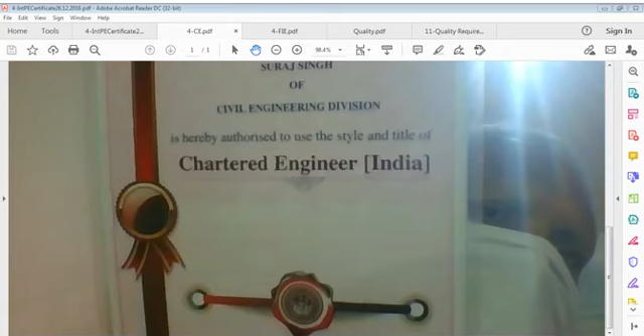And why do we have certificates? That's another question. Certificates like you're watching here, Chartered Engineer India, as well as corporate membership, fellow. Why do we have this? We have these certificates to tell the whole world. Actually, by these certificates, people know - gazette declared by these certificates. Why do I say gazette? Because these are formal certificates issued in every country for people of that country, and those people should know that this person is of this qualification or professional status. That's only indicatively I'm saying, because these certificates declare that you can utilize this person for your work. This is up to that person then, what that person takes interest - either one is hired, or one serves in capacity as employee, both ways. Well, I'm not going to do much on that. I'm just closing this because talking of this, otherwise with certificate I close this for some reason.

And now coming back to the topic, and that is quality. I have added in this quality issue also SHE - SHE stands for safety, health and environment. Quality is one part of life. Simultaneously, safety, health, environment being three other parts of life, which are one in three.

If there is safety, that is a must. There must be safety, otherwise you can't stay. If you are not safe, very easy - means there is no need for any explanation on this. One should be safe all the time. That is basic requirement - safe from every adverse impact. Safety should be there, whether you sleep or you work or you walk or do whatever activity you perform - any action you can perform only if you are safe.

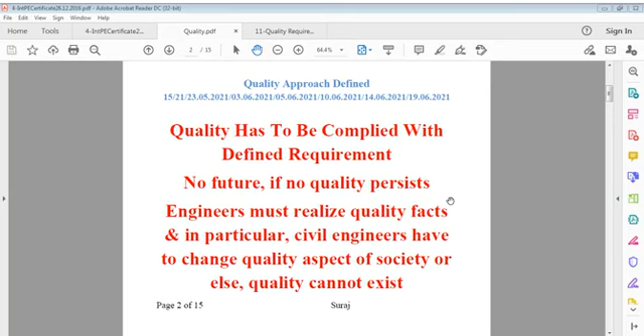So what I say, quality, safety, health, environment and all this, then you can say quality has to be complied with defined requirements. No future if no quality. Similarly, I can say no future if no quality persists. Engineers must realize quality facts, and in particular, civil engineers have to change the quality aspect of society, or else quality cannot exist.

So what I say, design of structures and others must be decisive, safe and qualitative, and reliable for execution. So they should be decisive. Decisive means what? You have to make decisions considering all aspects of safety and material quality, work quality and all. That's the point here.

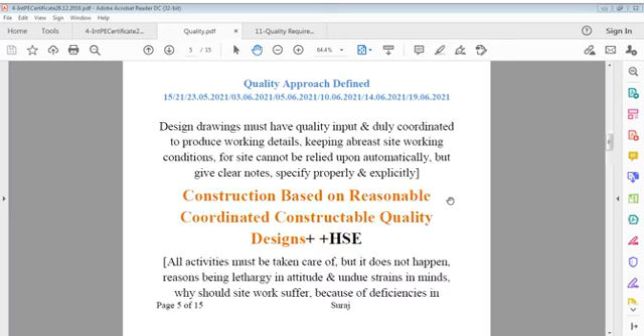So you can say construction based on reasonable, coordinated, constructible quality. That was done before also. Quality in designs plus HSE must be taken into consideration while designing. It's a must. What health level this project gives to society, what safety levels does it provide, and in what way environment can be improved by use of such materials or systems or technology. That all must come into picture, or else we only beat about the bush and nothing else.

We'll take care of HSE later on also. Now, as we discussed before, long back, last time, about quality checks. We refer to many items of buildings, of structures. Those items can't be ignored. This is a small list only, this is a long list actually. And we talk of checklists and ITPs. ITPs means inspection and test plans, and checklists to check whatever is required.

Whole structures, all structures, architectural items or finishing items, all items must be quality based. Even if you buy a small item, it should be quality based. It's not a question of what item it is, whatever item, because you are not getting it free of cost. You have to pay, and if your pay is not quality earning, certainly you won't mind about that. Oh, I made this money just for chance, so no problem, I can accept everything. If that thought comes to you or comes to one, we can never achieve quality. We can never achieve it.

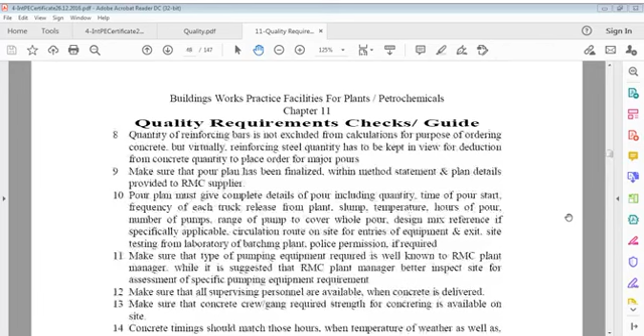When I say many activities are there, I explained to you about suspended slab last time, how slabs are important. There was RCC, DC generator, alternators, all these, suspended slab. It was a checklist for suspended slab concrete pour, and I said this is ultimate.

This is ultimate for accommodation, ultimate for living under. Columns were not ultimate, foundations were not ultimate, but slabs are ultimate, because slabs, once ready, allow you to use it under or use it over, both ways. You can use these slabs by staying below them. You may say slab is my head, or you can say roof is on my head, because roof slab is also a slab.

Suspended slab I call it, that's the term of suspension, means these are hung on some supports. These are hung on columns or walls, wherever. These are hung.

Suspended slabs, or slabs you can call, people call them lintel also, some people. I don't mind what they call it, but they should understand that they walk on that, they sleep below that, what sort of strength it should have, what sort of value should be given in its construction. That is a very important point.

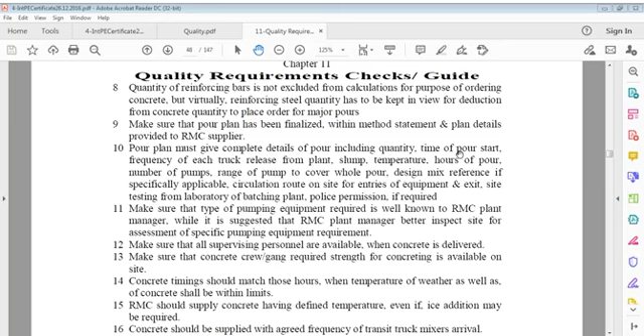This was only reason I tried to reflect these points. For example, in this I say quantity of reinforcement bars and quality of reinforcement bars are very important.

Then you can say pour plan. How do you want to pour it so that it should be a professional pour? We can call it professional pour, professional work of preparation, professional form work, professional steel fabrication, and electrical professional items, first fix, second fix. Likewise, we can say all these are accommodated in slabs, and slabs are the roof you have.

I go to there is another one, and that is checklist for massive blocks, foundations for equipment, foundations for machines, which are also part of life. Though it's not direct to you, these support you. You get electricity, you get some machine parts, you get some machines, you get some equipment. These are directly or indirectly connected to foundations.

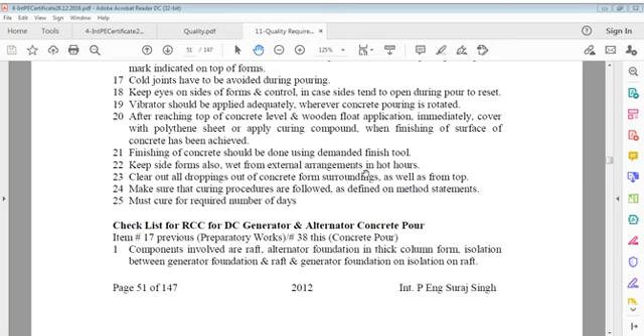And this part we should take very seriously. If we don't take it seriously, we do not understand anything. How this works, how it doesn't work, that's the only point here.

We have discussed many concrete pours, like how to prepare a surface or form a surface to start with, which we call formation. Formation of whatever work we do. Whatever work we do, that work shall have a foundation, and that foundation starts at some formation.

Formation means in what form you want to fill in that pit, in what form, a kind of format. So formation. And that formation is really the base of work. It's kind of foundation of a foundation, you can say. Right? Foundation of a foundation is called formation. If we do not know formation, we can't do foundation.

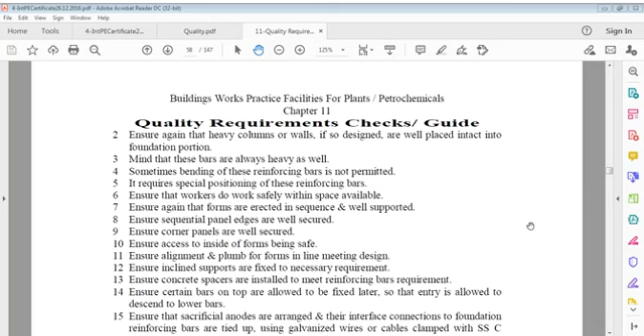I was talking about some items of heavy concrete. Now let's take a heavy compressor foundation concrete pour. Maybe I don't remember if I talked to you about this before, but it doesn't matter if I explain it again. What's wrong with that? After all, practice makes you stronger. So let us briefly talk on this.

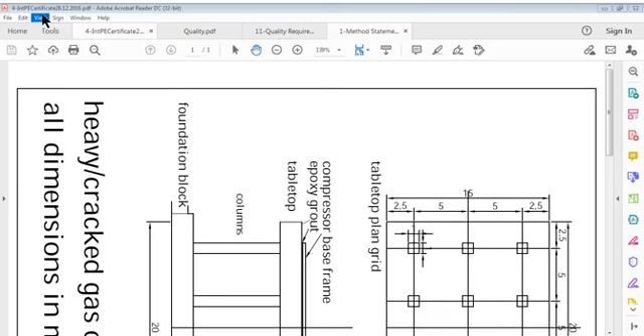I'm talking of compressor foundation concrete pour, and I'm sure I must have a diagram there which you have seen. Let me go and sort the diagram out from my records for your knowledge. Let's watch that. It is the compressor foundation. Yes, it is here. Now you can see the sketch here. It will now be clear to you, I think. Yes, it's clear to you.

Now you can see this is a plan here of the tabletop, and this is the compressor area. This is a plan, and these are various grids of this tabletop, and this is your section of the compressor base foundation. This section is a different one. It's like a structure, you can see this line here. This is the ground line, and this is the foundation, a big one. It's not an ordinary foundation, it's very much complicated, a massive block.

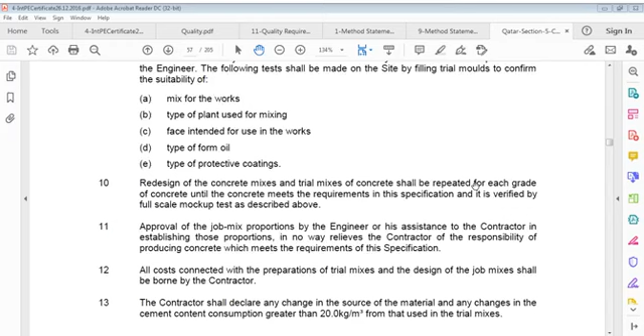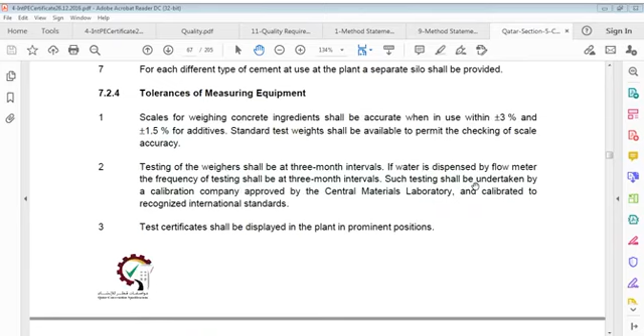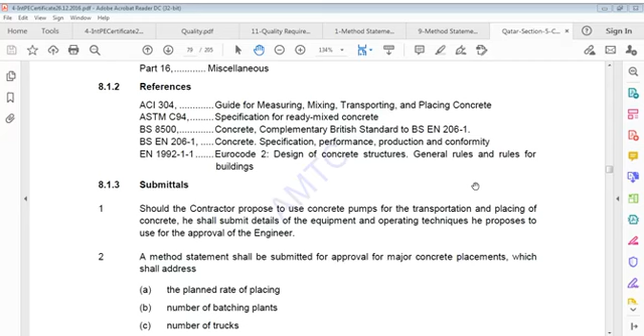Well, it's a long specification. In fact, I'm trying to find a temperature zone. There's a lot of specification in this. I'm not trying to find that.

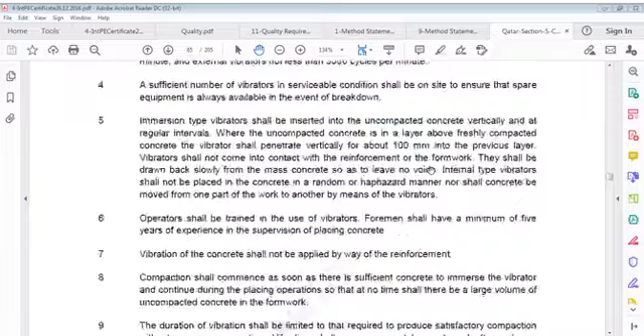All right, we'll talk about this. It's important also, let's say. This is placing concrete, a very important item. I will explain to you how to place it.

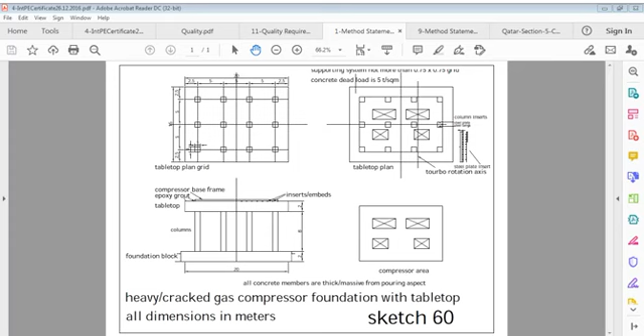Before this, let's see what the specification statement says. Contractor shall obtain approval of engineer to his proposed arrangements before beginning concreting. This is very common. Placing and compacting of concrete shall be carried out under, let us say, section 175. Do it. Contractor shall obtain approval of engineer to his proposed arrangements. Then all placing and compacting of concrete shall be carried out under direct supervision of a competent member of the contractor's staff with a minimum of 5 years of experience in concreting works.

5 years minimum - it can be 10, 15, doesn't matter. This means an experienced person is required, that's the demand of the specification, and the work must be done in a manner to produce watertight concrete of maximum density and strength. It's a very important point - watertight concrete of maximum density and strength.

For night concreting operations, contractor shall arrange adequate suitable lighting for illumination purposes. Contractor shall provide safe, secure access for all personnel. Safe, secure access for all personnel - that is very much expected, safe and secure access for all personnel during concreting operations.

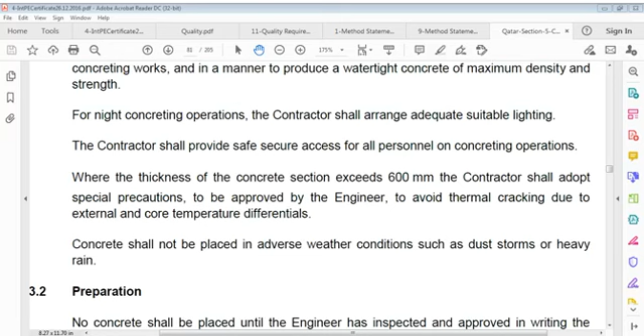Concrete shall not be placed in adverse weather conditions such as dust storms or heavy rain. Now, what is preparation? No concrete shall be placed until the engineer has inspected and approved in writing the surfaces upon which concrete is to be placed, formwork and reinforcing steel. Contractor shall give engineer at least 24 hours notice to enable this inspection.

That's all under different conditions. 24 hours notice is required. If concrete is not placed within 24 hours of approval being given, approval shall be obtained again before concreting. This means the previous approval automatically stands withdrawn.

An inspection shall be made immediately prior to concreting to check cleanliness of forms. This means a supplementary inspection - one inspection is for approval, then just before concrete, another inspection. This is procedure, only for procedure. All the time, engineers are there on site.

Wood forms, unless lined, shall be oiled. Wood forms means plywood - if it's lined, okay. If it's not lined, it shall be oiled or wetted with water in advance of placing concrete so that joints shall tighten and prevent seepage of cement grout from the mix.

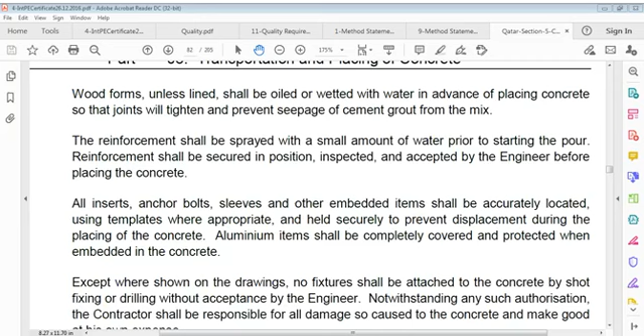Reinforcement shall be sprayed with a small amount of water prior to starting the pour. Reinforcement shall be secured in position, inspected and accepted by the engineer before placing concrete. All inserts, anchor bolts, sleeves and other embedded items shall be accurately located using templates where appropriate, and held securely to prevent displacement during placing of concrete. Aluminum items shall be completely covered and protected when embedded in concrete.

Except where shown on drawings, no fixtures shall be attached to concrete by shot firing, or shot fixing as it's also called, or by drilling, without acceptance by the engineer. No fixture shall be allowed. Notwithstanding any such authorization, the contractor shall be responsible for all damage so caused to concrete and shall make good at his own expense.

Water shall be removed from excavations before concrete is deposited. Any flow of water shall be diverted through proper side drains and removed without washing over freshly deposited concrete. All dewatering works shall be continued as long as required; dewatering activity must go on even during concrete placement, until the concrete hardens.

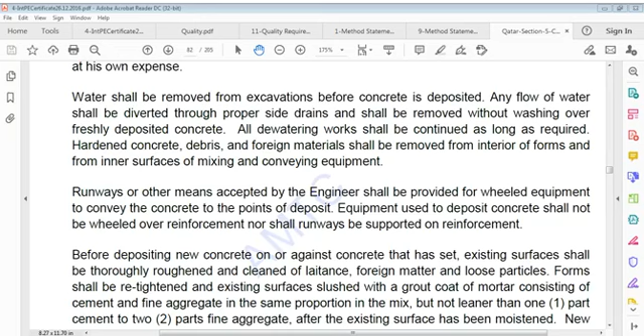Debris and foreign materials shall be removed from the interior of forms and from the inner surfaces of mixing and conveying equipment. Runways or other means accepted by the engineer shall be provided for wheeled equipment to convey concrete to points of deposit. Equipment used to deposit concrete shall not be wheeled over reinforcement, nor shall runways be supported on reinforcement.

Before depositing new concrete against concrete that has already set, existing surfaces shall be thoroughly roughened and cleaned of laitance, foreign matter and loose particles. Forms shall be retightened, and existing surfaces slushed with a grout coat of mortar consisting of cement and fine aggregate in the same proportion as the mix, but not leaner than 1 part cement to 2 parts fine aggregate. After the existing surface has been moistened, new concrete shall be placed before the grout has attained its initial set.

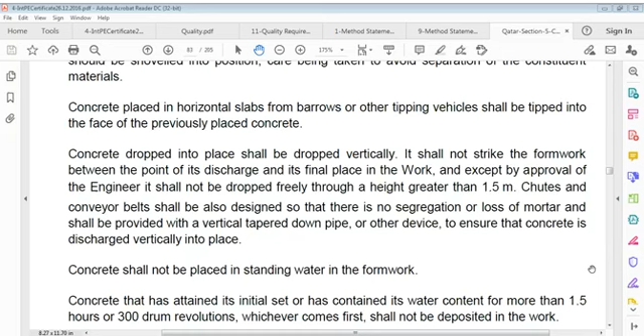Concrete shall not be placed in standing water in formwork. Concrete that has attained its initial set, or has contained its water content for more than 1.5 hours...

...or 300 drum revolutions, whichever comes first, shall not be deposited in the work. Important point: concrete that has attained its initial set or has contained its water content for more than 1.5 hours or 300 drum revolutions, whichever comes first, shall not be deposited in the work.

Cold weather concreting shall be in accordance with EN 1992-1-1, CIRIA Report 67, and ACI 306.

Hot weather concreting shall be in accordance with Part 15 of this section. Special care shall be taken to protect new concrete from the harmful effect of drying winds, and during wet weather, concrete shall be adequately protected as soon as it is in position.

No concreting shall be carried out during periods of continuous heavy rain unless it is completely covered during mixing, transporting, and placing. No concreting shall be carried out during dust storms.

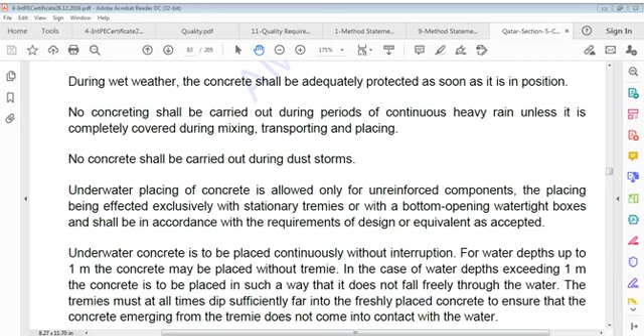Underwater placing of concrete is allowed only for unreinforced components, placing being effected exclusively with stationary tremies or with bottom-opening watertight boxes, and shall be in accordance with the requirements of design or equivalent as accepted.

Underwater concrete is to be placed continuously without interruption.

For water depths up to 1 meter, concrete may be placed without tremie.

In case of water depths exceeding 1 meter, concrete is to be placed in such a way that it does not fall freely through water.

Tremies must at all times dip sufficiently far into freshly placed concrete to ensure that concrete emerging from the tremie does not come into contact with water.

All work connected with placing of concrete under water shall be designed, directed, and inspected with due regard to local circumstances and purposes.

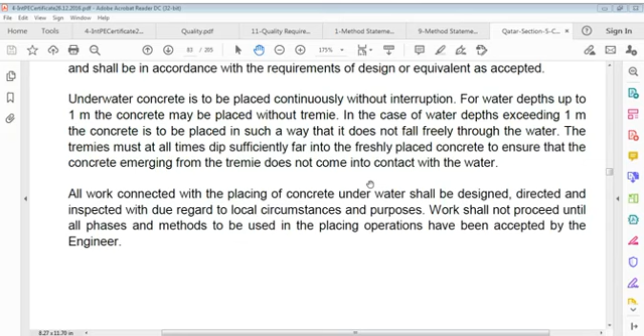Work shall not proceed unless all phases and methods to be used in placing operations have been accepted by the engineer. Transportation and placing of concrete continues.

Stops in concrete at the end of a period of work shall be made only at construction joint locations shown on drawings and/or positions accepted.

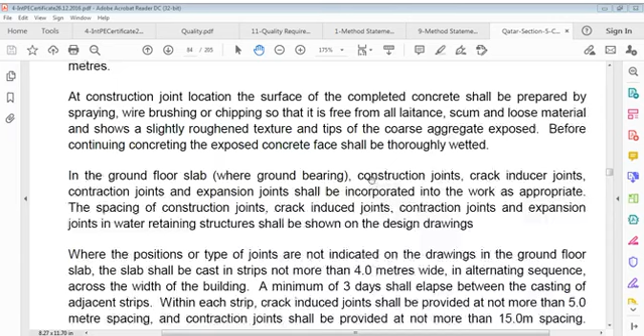In ground floor slabs, where ground bearing, construction joints, crack inducer joints, contraction joints, and expansion joints shall be incorporated as appropriate.

Construction joints, crack inducer joints, contraction joints, and expansion joints shall be incorporated into the work as appropriate.

Spacing of construction joints, crack inducer joints, contraction joints, and expansion joints in water retaining structures shall be shown on the design drawing.

Where positions or types of joints are not indicated on drawings, the ground floor slab shall be cast in strips not more than 4 meters wide, in alternating sequence across the width of the building.

To reemphasize: where the position or types of joints are not indicated in drawings, the ground floor slab shall be cast in strips not more than 4 meters wide in alternating sequence across the width of the building.

A minimum of 3 days shall elapse between casting of adjacent strips.

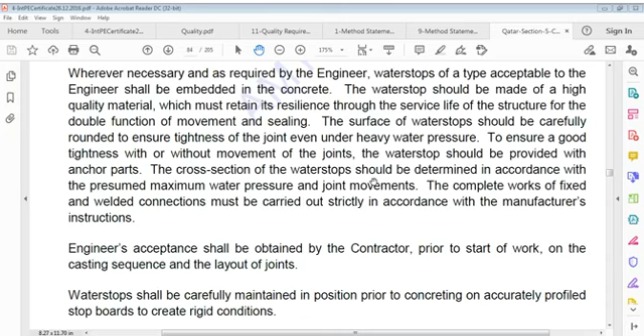Complete works of fixed and welded connections must be carried out strictly in accordance with the manufacturer's instructions. The engineer's acceptance shall be obtained by the contractor prior to starting work on the casting sequence and layout of joints. Water stops shall be carefully maintained in position prior to concreting, on accurately profiled stop boards, to create rigid conditions. The type of water bar used shall suit the joint and purpose according to the water bar manufacturer's recommendations.

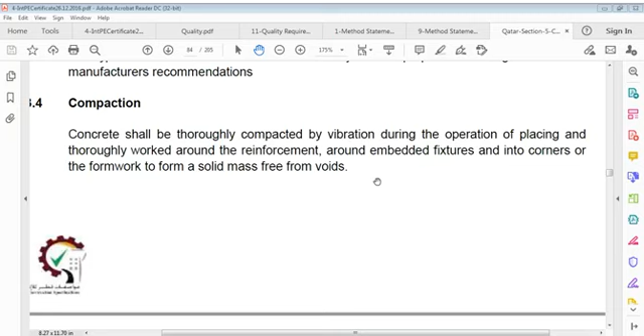Compaction: concrete shall be thoroughly compacted by vibration during placing, and thoroughly worked around reinforcement, around embedded fixtures, and into corners of formwork to form a solid mass free from voids.

When vibrators are used to compact concrete, vibration shall be applied continuously during placing of each batch of concrete until expulsion of air has practically ceased, and in a manner that does not promote segregation of the constituents of concrete. Immersion type vibrators shall be capable of producing not less than 10,000 cycles per minute, and external vibrators not less than 3,000 cycles per minute.

A sufficient number of vibrators in serviceable condition shall be on site to ensure spare equipment is always available in the event of a breakdown.

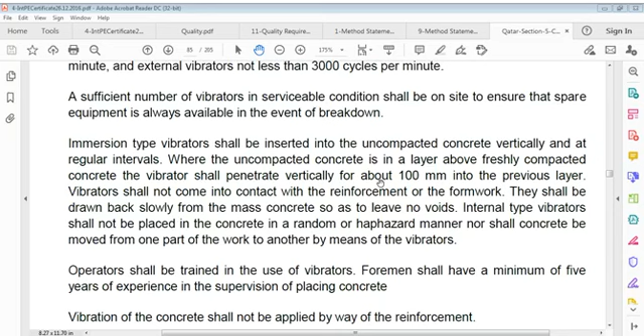Immersion type vibrators shall be inserted into uncompacted concrete vertically and at regular intervals. Where uncompacted concrete is in a layer above freshly compacted concrete, vibrators shall penetrate vertically for about 100 mm into the previous layer. Vibrators shall not come into contact with reinforcement or formwork, and shall be drawn back slowly from the mass concrete so as to leave no voids.

Internal type vibrators shall not be placed in concrete in a random or haphazard manner, nor shall concrete be moved from one part of the work to another by means of a vibrator. Operators shall be trained in the use of vibrators. Foremen shall have a minimum of 5 years of experience in supervision of placing concrete. Vibration of concrete shall not be applied by way of reinforcement.

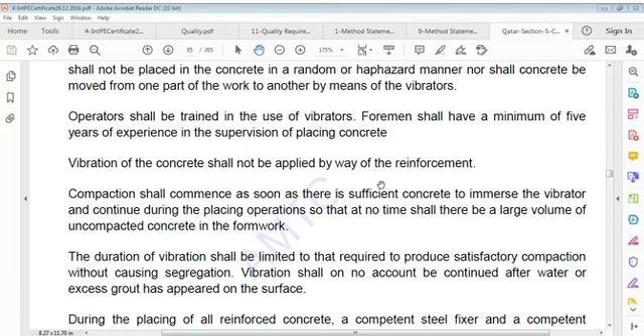Compaction shall commence as soon as there is sufficient concrete to immerse the vibrator and continue during placing operations, so that at no time shall there be a large volume of uncompacted concrete in the formwork. Duration of vibration shall be limited to that required to produce satisfactory compaction without causing segregation. Vibration shall on no account be continued after water or excess grout has appeared on the surface.

During placing of reinforced concrete, a competent steel fixer and a competent carpenter shall be in attendance on each concreting gang. They shall ensure reinforcement, embedded fittings, and forms are kept in position as work proceeds.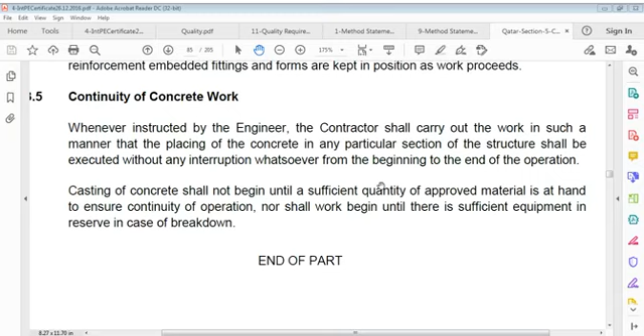Continuity of concrete work: whenever instructed by the engineer, the contractor shall carry out work in such a manner that placing of concrete in any particular section of structure shall be executed without interruption from beginning to end of the operation. Casting of concrete shall not begin until a sufficient quantity of approved material is at hand to ensure continuity of operation, nor shall work begin until there is sufficient equipment in reserve in case of breakdown.

This was some general methods given for this purpose, and we are not going to talk about formwork in this case. Quality assurance is there, but it is at the batching plant. Now, what about forms and materials of form?

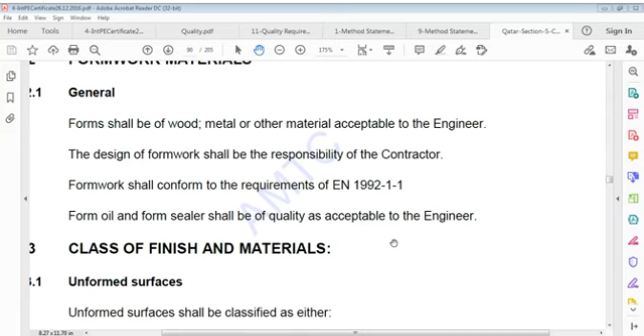Say, wood material or other materials acceptable - that's a very important point. Or you can say class of finishes. There are some classes of finishes. Timber trowel finish, the U4 class, is an unformed surface - there is no form on that. Unformed is indicated by U. So U4 is timber trowel finish, U3 is steel trowel finish, U2 is brush finish, and U1 is other finish designated by the engineer. Here we are saying timber trowel finish is U4, steel trowel finish is U3, brush finish is U2, and U1 is other finish.

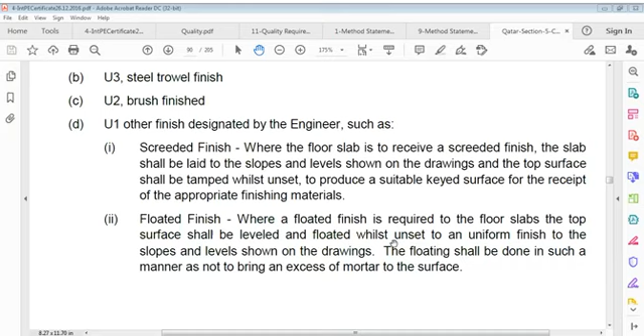Screed finish: where the floor slab is to receive a screeded finish, the slab shall be laid to slopes and levels shown on drawings, and the top surface shall be tamped while unset to produce a suitable keyed surface for receipt of appropriate finishing materials. Floated finish: where a floated finish is required on the floor slab top surface, it shall be leveled and floated while unset to a uniform finish to the slopes and levels shown on the drawing. Floating shall be done in such a manner as not to bring an excess of mortar to the surface.

Dust-proof finish: where concrete surfaces are required to provide a dust-proof finish, these shall be treated with 2 coats of accepted material. Each coat shall be applied with a soft brush on a clean and dry surface in accordance with manufacturer's printed instructions.

Non-slip finish: concrete surfaces described in drawings as having a non-slip finish shall be treated with carborundum dust evenly sprinkled on whilst concrete is still grey, at a rate of 1.5 kg per meter square, and lightly troweled in before final finishing. Alternatively, carborundum dust may be incorporated into the finish by means of a mechanical power float.

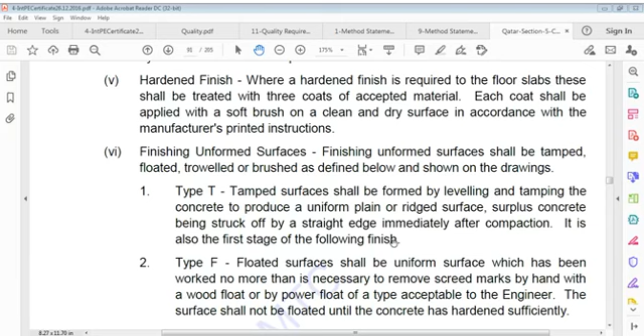Hardened finish: where a hardened finish is required to floor slab, these shall be treated with 3 coats of accepted material. Each coat shall be applied with a soft brush on a clean and dry surface in accordance with manufacturer's printed instructions.

Finishing unformed surfaces: finishing unformed surfaces shall be tamped, floated, troweled, or brushed as defined below. Type T tamped surface shall be formed by leveling and tamping concrete to produce a uniform plain or ridged surface, with surplus concrete being struck off by a straight edge immediately after compaction. It's also the first stage of following finish.

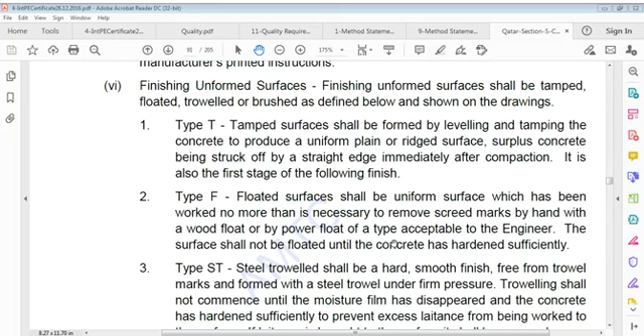Type F floated surface shall be a uniform surface which has been worked on no more than is necessary to remove screed marks, by hand with a wood float or by power float of a type acceptable to engineer. Surface shall not be floated until concrete has hardened sufficiently.

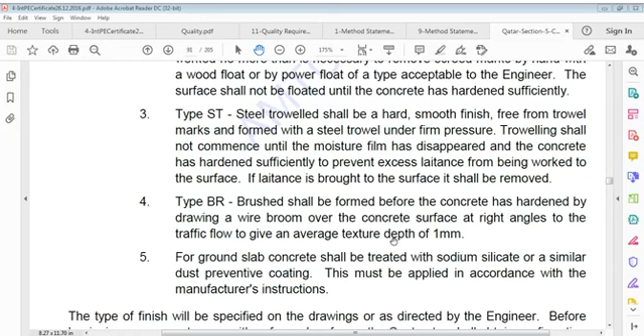ST steel troweled shall be a hard, smooth finish, free from trowel marks, and formed with a steel trowel under firm pressure. Troweling shall not commence until the moisture film has disappeared and concrete has hardened sufficiently to prevent excess laitance from being worked to the surface. If laitance is brought to the surface, it shall be removed.

Type BR brush shall be formed before concrete has hardened by drawing a wire broom over the concrete surface at right angles to traffic flow, to give an average texture depth of 1 mm.

For ground slab, concrete shall be treated with sodium silicate or a similar dust preventive coating. This must be applied in accordance with manufacturer's instructions.

This type of finish shall be specified in drawings or as directed by engineer before beginning any concrete pour with unformed surfaces. Contractor shall obtain confirmation of the type of finish required from engineer. Initial finishing of unformed surfaces shall commence immediately after placing and compaction have been effected. Suitable access boards or platforms shall be provided to allow access to all parts of unformed surfaces to be finished.

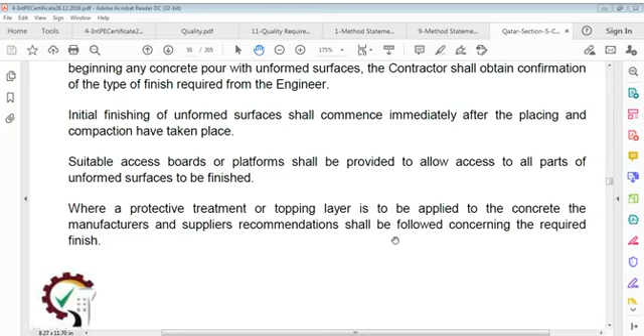Where a protective treatment or topping layer is to be applied to concrete, manufacturer and suppliers' recommendations shall be followed concerning required finish. Brush finish shall be obtained by carrying out a steel trowel finish and then using a suitable stiff nylon brush dragged lightly across the surface. Addition of a small quantity of water to the finishing trowel will be permitted to aid finishing.

Addition of a small quantity of water to the finishing trowel will be permitted to aid finishing.

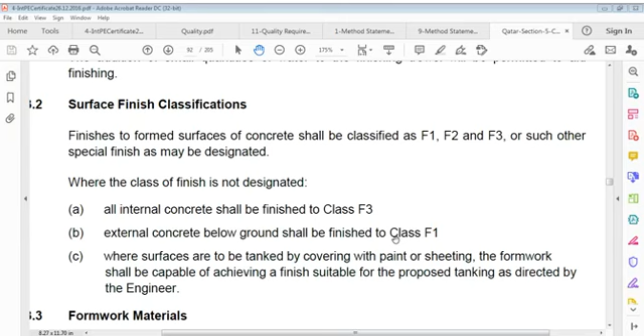Surface finish classifications: finishes to formed surfaces of concrete shall be classified as F1, F2, F3, or such other special finish as may be designated. Where class of finish is not designated, all internal concrete shall be finished to class F3. External concrete below ground shall be finished to class F1. Where surfaces are to be tanked by covering with paint or sheeting, formwork shall be capable of achieving a finish suitable for the proposed tanking as directed by engineer.

Formwork material: formwork for class F3 finish shall be lined with as large panels as possible of non-staining materials with a smooth, unblemished surface, such as sanded plywood or hard compressed fiber board, arranged in a uniform approved pattern and fixed to the formwork by oval nails. The same type of lining shall be used throughout any one structure. Unfaced wrought boarding or standard steel panels shall not be permitted.

Formwork for class F2 finish shall be faced with wrought tongued and grooved boards or plywood arranged in a uniform approved pattern, free from defects likely to detract from the appearance of the surface. Formwork for class F1 finish shall be constructed of timber or of whatever suitable materials which will prevent loss of grout when concrete is vibrated.

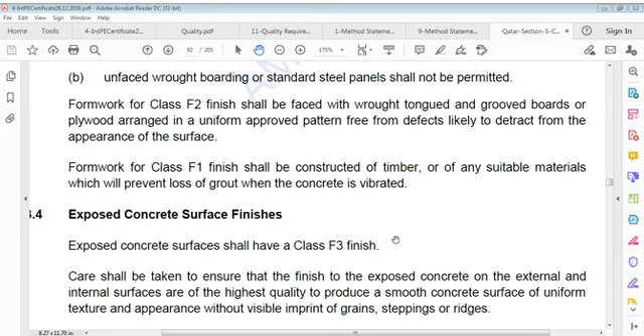Exposed concrete surface finishes: exposed concrete surfaces shall have a class F3 finish. Care shall be taken to ensure that the finish to exposed concrete on external and internal surfaces is of the highest quality, to produce a smooth concrete surface. This means exposed concrete surface shall have a class F3 finish.

Care shall be taken to ensure that finish to the exposed concrete on external surfaces are of highest quality, to produce a smooth concrete surface of uniform texture and appearance without visible imprint of grains, steppings or ridges. Resulting concrete shall be free from honeycombing, stains, fins, lipping, nail and screw marks, raised grain marks, or any other imperfections, and shall be of uniform surface, texture, and color.

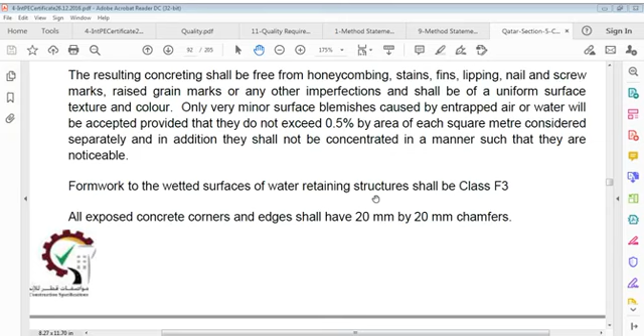Formwork to wetted surface of water retaining structures shall be class F3. All exposed concrete corners and edges shall have 20 mm by 20 mm chamfers. Grooves in exposed concrete shall be formed by attaching tapered planed timber battens accurately aligned to face of formwork.

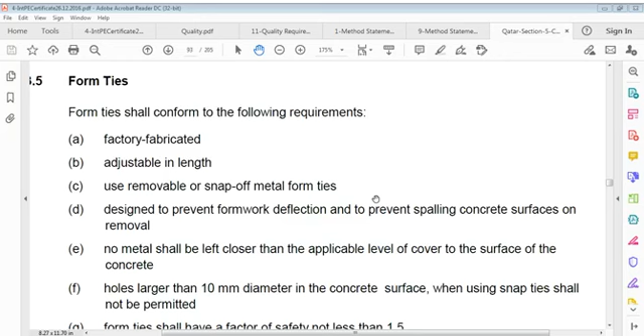Form ties shall conform to the following requirements: factory fabricated, adjustable in length, use removable or snap-off metal form ties designed to prevent formwork deflection and to prevent spalling concrete surfaces on removal. No metal shall be left closer than the applicable level of cover to the surface. Holes larger than 10 mm diameter in concrete surfaces when using snap ties shall not be permitted. Form ties shall have a factor of safety not less than 1.5.

I will talk later on all this.

Regarding coating and accessories: form coating shall be commercial formulation form coating compounds that shall not bond with, stain or adversely affect concrete surfaces requiring bond or adhesion, nor impede wetting of surfaces to be cured. Use of form coating shall be strictly in accordance with manufacturer's instructions.

Formwork in contact with concrete shall be treated with a suitable non-staining mold oil to prevent adherence of concrete. Forms for exposed surfaces shall be coated with oil before reinforcement is placed. Forms for unexposed surfaces may be thoroughly wetted.

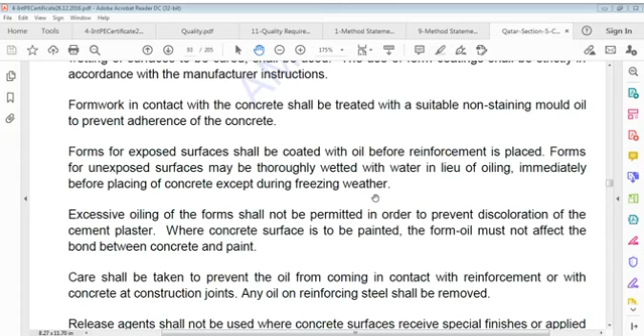With water in lieu of oiling, immediately before placing concrete, except during freezing weather. Excessive oiling of forms shall not be permitted in order to prevent discoloration of cement plaster.

Where concrete surface is to be painted, form oil must not affect bond between concrete and paint. Care shall be taken to prevent oil from coming in contact with reinforcement or with concrete at construction joints. Any oil on reinforcing steel shall be removed.

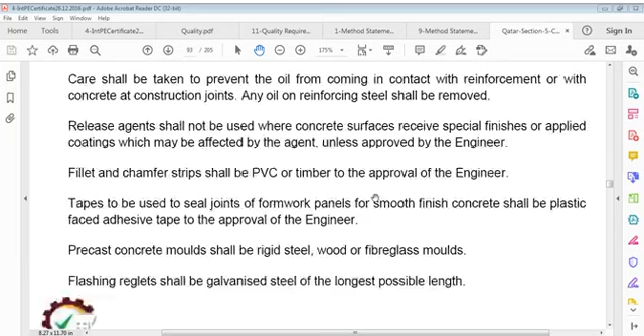Release agents shall not be used where concrete surfaces receive special finishes or applied coatings which may be affected by the agent, unless approved by the engineer. Tapes used to seal joints of formwork panels for smooth finish concrete shall be plastic faced adhesive tape, subject to approval of engineer. Precast concrete molds shall be rigid steel, wood or fiberglass mold. Flashing reglet shall be galvanized steel of longest possible length.

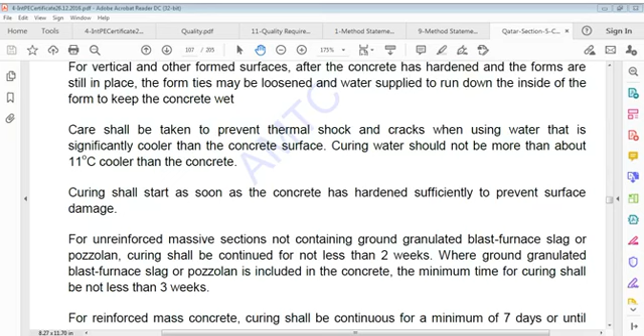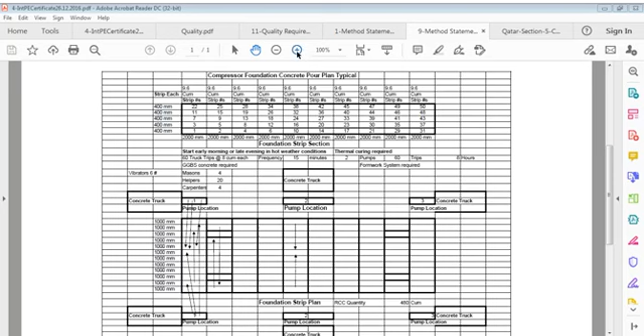So let's do a little about, in this case, which is also very interesting. Very interesting.

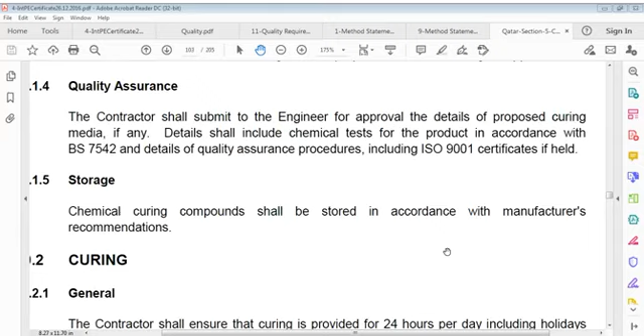Let's go back a little more so we find here what's required - curing. Curing, chemical curing compound shall be stored. After all, what's that important item - curing?

Contractor shall ensure that curing is provided for 24 hours per day, including holidays, and that all necessary plant and labor resources are also available. Special attention shall be given to curing of vertical and overhanging surfaces to ensure satisfactory curing. Contractor shall adopt curing measures that preclude the possibility of thermal shock to concrete during curing.

Sorry, your voice here. This is a stool. I have to keep my leg on this stool for relaxing because my leg is not healthy. It's problematic, it swells. Sorry for that.

Contractor shall adopt curing measures that preclude possibility of thermal shock to concrete during curing. This may be achieved by ensuring that the temperature of water used for curing does not differ from that of concrete by more than 15 degrees Celsius. Mind it, whatever temperature of concrete you have to cure, the temperature of water should not be more than 15 degrees of that. For example, if surface of concrete is say 15 degrees, so water should be 30 degrees.

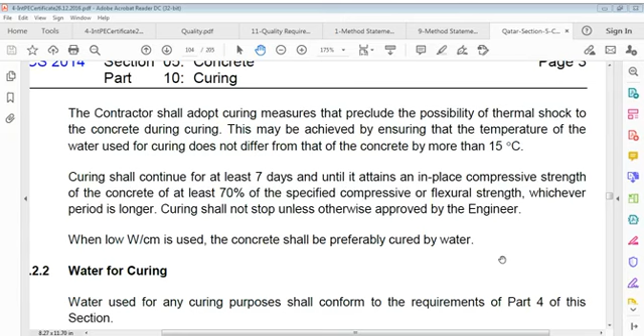When low water cement concrete is used, concrete shall preferably be cured by water. Water used for curing purposes shall conform to requirements of Part 4 of this section.

General requirement: freshly placed concrete shall be protected from sun, wind, rain exposure, and excessive drying out. All concrete shall be cured for a period of time required to obtain full specified strength, but not less than 7 consecutive days.

All concrete shall be cured for a period of time required to obtain full specified strength, but not less than 7 consecutive days, maybe more. Method of curing shall be by water for the first 7 days, and by water or membrane until concrete has reached full specified strength.

For mixtures with a low to zero bleeding rate, or in case of an aggressively evaporative environment, or both, curing shall start at any time between the placement and final finishing of concrete. Curing shall be by reducing moisture loss from the surface using a fogging system, and the use of evaporation reducers such as monomolecular water curing compound.

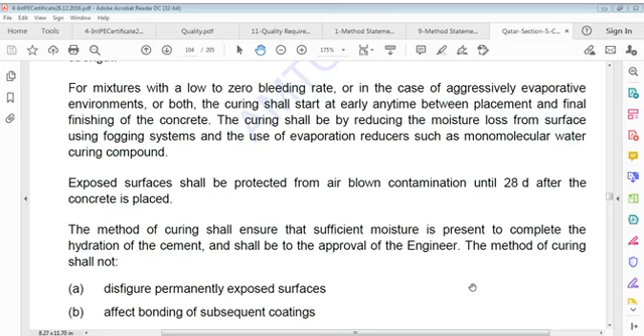Monomolecular water curing compound is called evaporation reducers. Exposed surfaces shall be protected from air blown contamination until 28 days after concrete is placed.

Method of curing shall ensure that sufficient moisture is present to complete hydration of cement and shall be to approval of engineer. Method of curing shall not disfigure permanently exposed surfaces, shall not affect bonding of subsequent coatings, shall not increase temperature of concrete. During curing period, exposed concrete surface shall be protected from direct rays of sun.

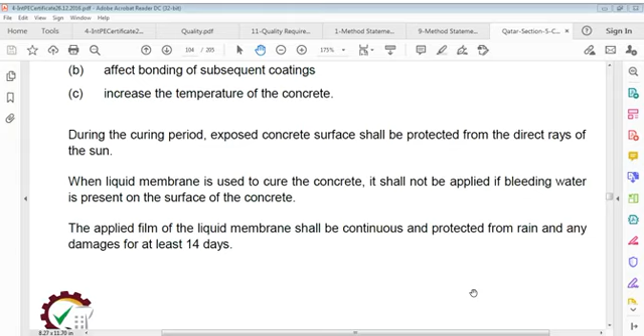When liquid membrane is used to cure concrete, it shall not be applied if bleeding water is present on surface of concrete. Applied film of liquid membrane shall be continuous and protected from rain and any damages for at least 14 days.

Curing of formed surfaces. Formed surfaces including underside of beams, girders, supported slabs and the like by moist curing with forms in place for full curing period or until forms are removed. When forms are stripped, curing shall continue by any approved method.

When liquid membrane curing is used, it shall be applied immediately after deshuttering. In such cases, concrete surface shall be prepared prior to application of membrane as recommended by manufacturer. Water curing is not required when liquid membrane is used.

Curing of unformed surfaces. Unformed surfaces shall be protected as soon as possible after concrete has been placed by polythene sheeting. When sufficiently hard, Hessian or other absorbent materials shall be placed on concrete surface and kept wet for required period. Hessian shall be overlaid with a sheet of 1000 gauge polythene to assist in retention of water. Alternatively, a curing method approved by engineer may be used.

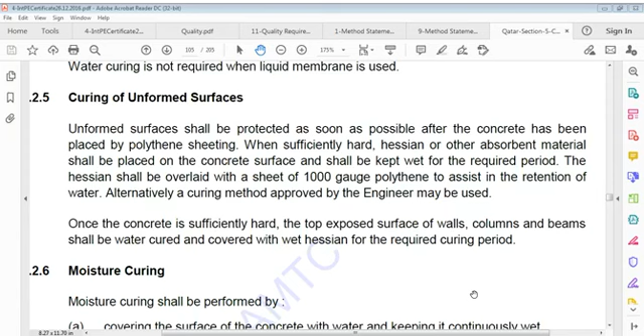Once concrete is sufficiently hard, top exposed surface of walls, columns and beams shall be water cured and covered with wet Hessian for required curing period.

Moisture curing shall be performed by covering surface of concrete with water and keeping it continuously wet, by continuous use of fine fog water spray, or by covering surface with a saturated absorptive cover and keeping it continuously wet. Burlap, cotton mats and other absorbent materials can be used to hold water on horizontal or vertical surfaces.

Wet straws or hay can be used for wet curing small areas, but there is a danger that wind might displace it unless it is held down with screen wire, burlap or other means. Where this method is employed, the material used shall not be made from fill from excavations or other areas where there is possibility of chloride contamination.

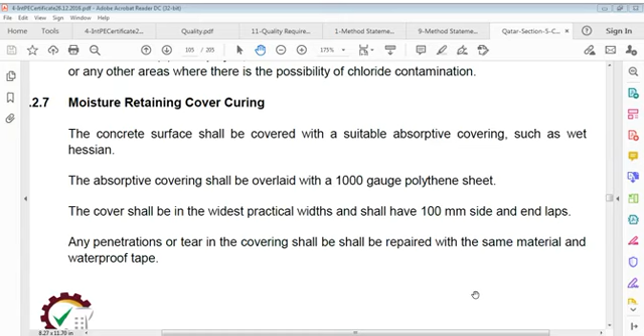Moisture retaining cover curing. Concrete surfaces shall be covered with a suitable absorptive covering such as wet Hessian. Absorptive covering shall be overlaid with a 1000 gauge polythene sheet. Cover shall be in widest practical widths and shall have 100 mm side and end overlaps. Penetrations or tears in covering shall be repaired with same material and waterproof tape.

Liquid membrane curing. Liquid membrane curing shall be in accordance with requirements of BS 7542, ASTM C309 or C1315 when tested at rate of coverage used on job. ASTM C156 shall be used as a test method to evaluate water retention capability of liquid membrane forming compounds. ASTM C1151 provides an alternative laboratory test for determining efficiency of liquid membrane forming compounds.

Membrane forming curing compounds shall be applied in accordance with manufacturer's recommendations immediately after any water sheen which may develop after finishing has disappeared from surface, and within 2 hours of stripping formwork. Membrane forming curing compound shall not be used on surfaces against which additional concrete or other materials are to be bonded, unless it's proven that curing compound will not prevent bond. Positive measures are taken to remove it completely from those areas which are to receive bonded applications on fair face concrete surfaces.

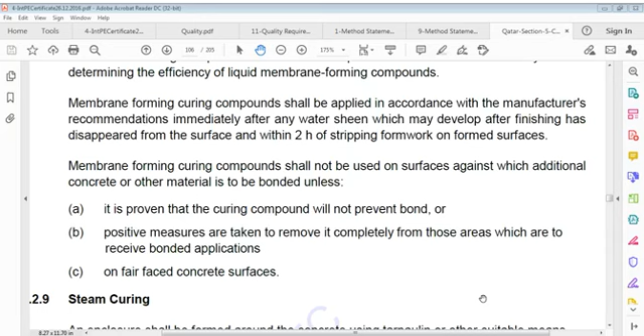Steam curing. An enclosure shall be formed around concrete using tarpaulin or other suitable means. Application of steam shall not be commenced until at least 2 hours after final placement of concrete. Steam shall be applied at a temperature between 65 to 80 degrees Celsius.

Excessive rate of heating and cooling shall be prevented during steam curing, and temperature in enclosure shall not be allowed to increase or decrease by more than 22 degrees Celsius per hour. Maximum steam temperature shall be maintained in enclosure until concrete has reached its specified strength.

Curing shall ensure no plastic shrinkage crack will occur. This can be done by protective measures such as sun shields, wind breaks, evaporation reducers, or fog spraying, which shall be initiated immediately to reduce evaporation.

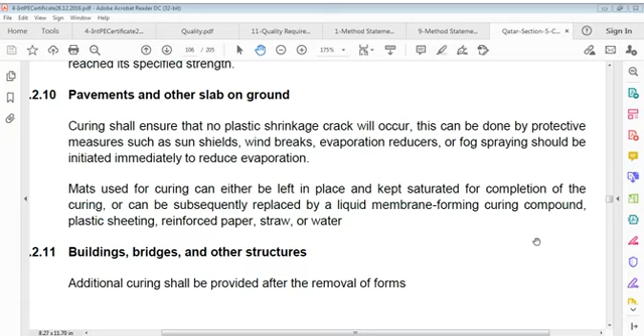Mats used for curing can either be left in place and kept saturated for completion of curing, or can be subsequently replaced by a liquid membrane forming curing compound, plastic sheeting, or reinforced paper, straw, or water.

For buildings, bridges, and other structures, additional curing shall be provided after removal of forms, after concrete has hardened and while the forms are still in place. On vertical and other formed surfaces, form ties may be loosened when damage to concrete will not occur, and water applied to run down the inside of forms to keep concrete wet.

Care shall be taken to prevent thermal shock and cracks when using water that is significantly cooler than the concrete surface. Curing water shall not be more than about 11 degrees Celsius cooler than the concrete.

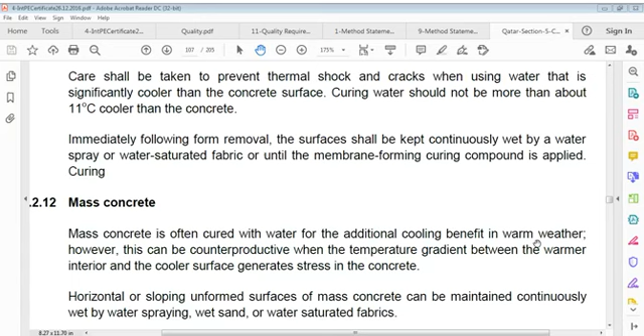Immediately following formwork removal, surfaces shall be kept continuously wet by a water spray or water saturated fabric, or until a membrane forming curing compound is applied. Mass concrete.

Mass concrete is often cured with water for additional cooling benefit in warm weather. However, this can be counterproductive when the temperature gradient between the warmer interior and cooler surface generates stress in the concrete.

Horizontal or sloping unformed surfaces of mass concrete can be maintained continuously wet by water spraying, wet sand, or water saturated fabric. For vertical and other formed surfaces, after concrete has hardened and forms are still in place, form ties may be loosened and water supplied to run down the side of forms to keep concrete wet.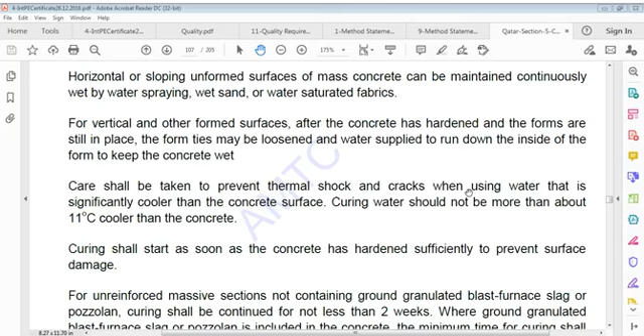Care shall be taken to prevent thermal shock and cracks when using water that is significantly cooler than the concrete surface. Curing water should not be more than about 11 degrees cooler than the concrete. Curing shall start as soon as the concrete has hardened sufficiently to prevent damage.

For unreinforced massive sections not containing ground granulated blast furnace slag or pozzolanas, curing shall be continued for not less than 2 weeks. Where ground granulated blast furnace slag or pozzolana is included in the concrete, the minimum time for curing shall be not less than 3 weeks.

For reinforced mass concrete, curing shall be continuous for a minimum of 7 days or until 70% of specified compressive strength is obtained. If strength is the key concrete performance criteria, for construction joints curing shall be continued until resumption of concrete placement or until the required curing period is completed.

Curing shall not stop until a favorable differential temperature is attained and approved by the engineer. For mass concrete, thermocouples shall be used to monitor the temperature differential of the concrete.

Thermocouples, I think you know about that. No, I don't know. Thermocouple, the reinforcement will take up later on. Now I'm trying to get some information from the web. Let me see, it's time... oh, time is less now. Let me close this file, and let me close this diagram.

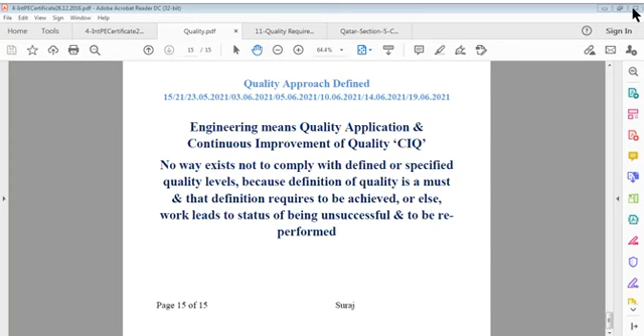Let me close this diagram as well. Let me close this as well. No, not this one, let me close quality. Okay, let me see if I can find something about thermocouples, just for reference.

Thermocouples, thermometers, thermocouples. Let's see, high pressure thermocouples, RTD counts. Thermocouples are these, you can see.

A thermocouple is an electrical device consisting of two dissimilar electrical conductors forming an electrical junction. So what's a thermocouple and how does it work? Let me see what that says.

Oh my God, this is loading very, very slowly. They go to the side. Stay here.

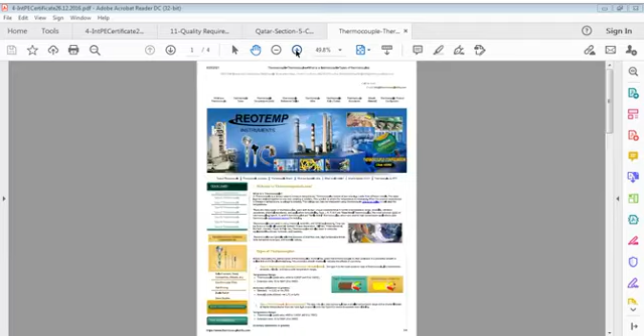This is a thermocouple, you can say, which is like this. As I mentioned before, before discussing various types of thermocouple, note that a thermocouple is often enclosed in a protective sheath to isolate it from the local atmosphere. This protective sheath drastically reduces the effects of corrosion.

Now, type K thermocouple: nickel-chromium, nickel-aluminum. Type K is the most common type of thermocouple. It's inexpensive, accurate, reliable, and has a wide temperature range. The thermocouple grade wire range is minus 270 to 1260 degrees Celsius. Extension wire is 32 to 200 degrees Celsius. Accuracy, whichever is greater, is plus minus 2.2 Celsius or plus minus 0.75%, special limits of error.

Now type J. This is type K, you can see the extension grade wire. Type K is most common, and this is type T thermocouple grade wire, copper. Previously it was nickel chromium, nickel aluminum for type K, chromium, and now this is type T, thermocouple copper-constantan. Type T is a very stable thermocouple and is often used in extremely low temperature applications such as cryogenics or ultra low freezers.

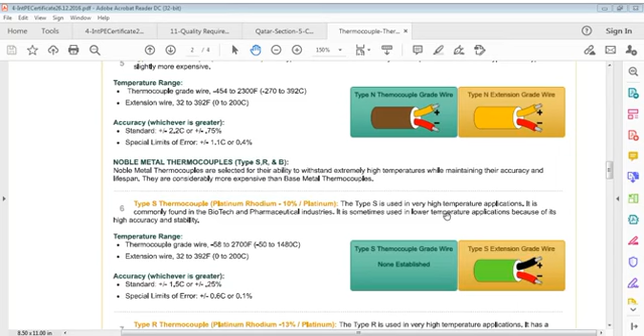Then there's type N thermocouple grade wire, nicrosil. Type N shares the same accuracy and temperature limit as type K. Noble metal thermocouples we'll talk about later also. This is thermocouple grade wire type N, then type S, type R, type B. We'll talk about those later, it's a very important item I got by chance.

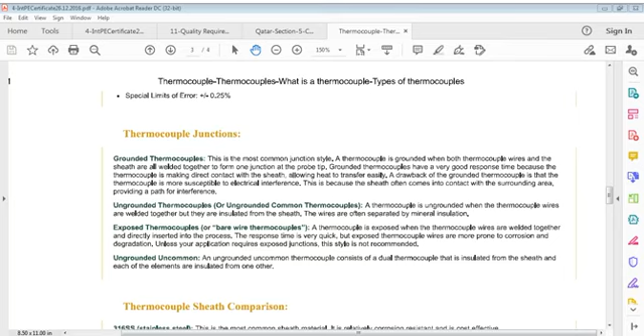Now we'll go back to our talk, and the important point is that we have grounded thermocouples and various other thermocouples that we had seen. We'll have a good talk on this later on, but now there's no time for this.